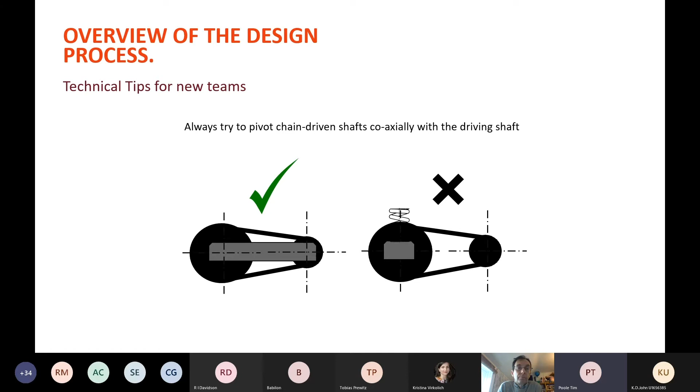Secondly, the other thing, make sure that when you drive chain wheels, the shaft can't move sideways either, because the moment you move a driven shaft sideways, longitudinally, the chain will fly off. So make sure whatever suspension systems you have perfect alignment, and it stays perfectly aligned along the length of the axle as well. It can't slide sideways. That, of course, is exactly how you change gears on a push bike. You really do need to make sure there's no longitudinal movement of the axle.

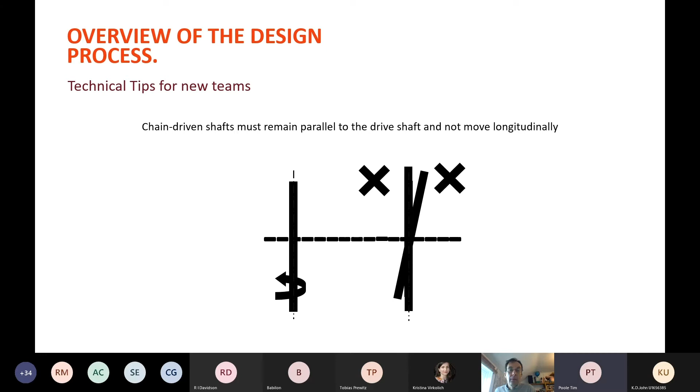The next thing is push connectors. This again was one team had a major failure of their locomotive, where a pipe fell off the back of the horn, believe it or not. That horn was being fed off the main air main running down the train, which of course is also what powers the brakes. And the locomotive correctly had a system that if you lost the air pressure, all the brakes went on. So literally, the connector flying off the back of the horn brought the entire thing to a very

severe and terminal halt. Basically, the pipe was held onto the back of the horn just with a rubber normal push fit connector, which in normal life would be fine. Locomotives are a very harsh vibration environment. Don't rely on push connectors. In fact, don't generally rely on anything where it is a single connection. In other words, with this push fit, there should have been a Jubilee clip round it as well. Not necessarily in normal environments. On a train, you need to do this.

If you're going to put circuit boards onto a backplane, don't rely on the friction of the circuit board in a backplane. That may be perfectly okay for a computer at home. It certainly is not on a train. It will fall out. So really look at every critical connection and make sure it's held in at least twice. We'll come to some more slides.

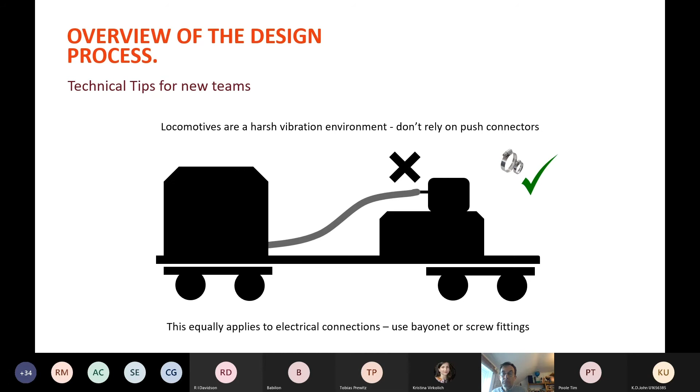And so there we are, another example. There's a push fit of a PCB going into a backplane. If you do have such a device, remember that will fall out as quick as you put it in on a train. Trains have steel wheels running along steel rails, running along rail joints. They are being hit roughly every 10 seconds with a hammer. That's how you have to consider a locomotive.

If you push this into a backplane, it will come out as quick as you push it in within about 50 meters. Please double secure every joint.

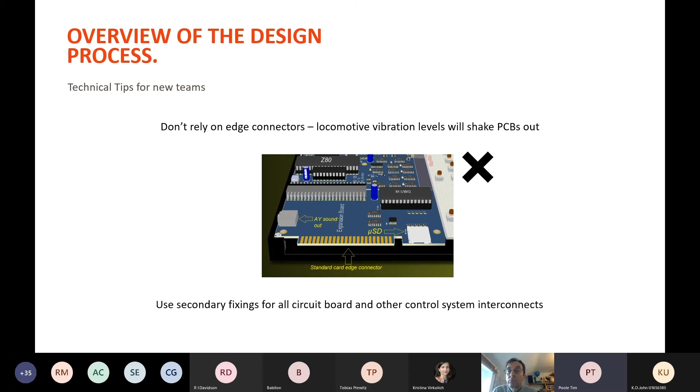Thank you, Kristina. Next slide.

And that, of course, is the same with nuts and bolts. Do not just use nuts and bolts anywhere on the locomotive at all. Please think of some way of locking them in. You can use any one of these systems that I've put on this diagram here, but please lock everything in. This is a very nasty vibration environment, a locomotive, and any nut and bolt that is not fixed twice, if you like, locked in some way, will come undone.

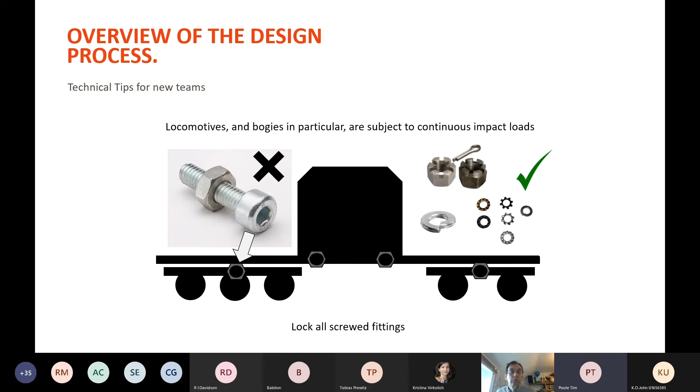The next thing is, and this is where we come to what we found was quite surprising on the challenge, which was it wasn't always the old teams that won, which was a slight mystery to start with, and then we realized what was going on.

If you have last year's locomotive and they have not done the wiring neatly, they have not logged the change to the wiring, they have not done proper wiring looms, proper diagrams, not put cable labels on, what happens is the team who then inherits that locomotive the next year, when it doesn't work, and that is almost 100%, they will have no chance of mending it whatsoever because they have not got any diagrams, any wiring labeling, and they will have no clue as to how to mend what is not functioning.

More for the sake of the next year's team, but even for the sake of yourselves, when it doesn't work in the field, when something goes wrong, please really do think about how a professional locomotive would be built. And it would be done with neat wiring looms, every cable labeled, everything written up on a schematic diagram, so that when things don't work, when things go wrong, you stand a chance of getting it mended. The number of times we see teams, sort of 8, 10, 12 hours working all night on locomotives, trying to work out why it doesn't work, what's connected to what.

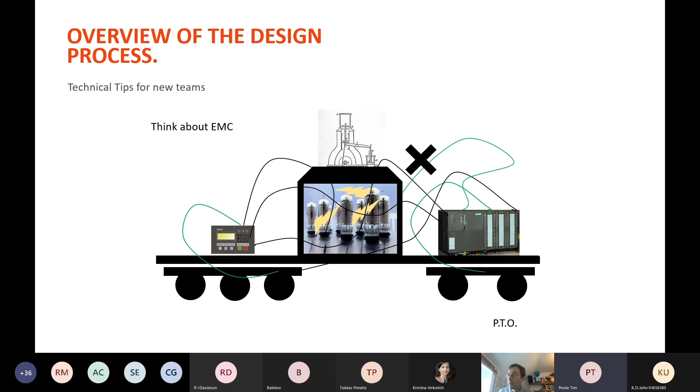So here's some quick hints and tips provided by one of my colleagues. Make sure you have isolated power supplies to power the control electronics. Electrically isolate all control inputs, outputs. Why not use opto-isolators? That's a very good way of doing it. Keep the control wire neat and away from the noise sources, unlike that diagram you just saw. Use twisted pairs and screen cables. Think about if you can't avoid it or you're worried, screen the cables.

Have a common chassis earth. Make sure that everything goes with a single connection to the ground, not 2 connections, or it'll build up earth loops. Avoid circulating screen currents in the control electronics. Have a common connection point for screen connections. Again, back to that single earthing point. Obviously, if you can, put stuff into earthed metal enclosures rather than plastic enclosures. That will help you as well. There's just a few hints and tips.

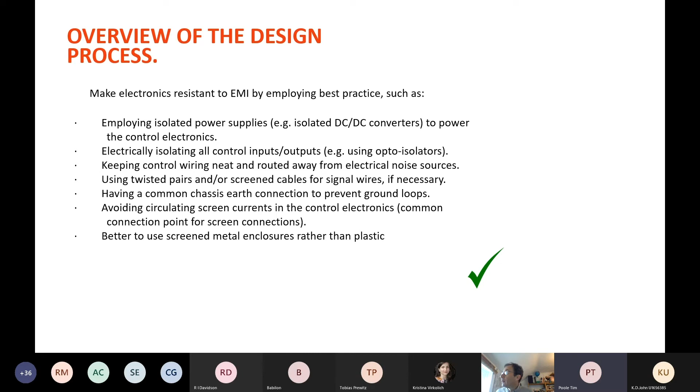So really think about EMC because the trouble with an EMC fault, there is not an obvious fault. It's not something you can see. You can't work out why the signal isn't going from A to B. They appear to both be connected at both ends. These are very difficult faults to isolate. So really think about EMC. Next slide, please.

Also bear in mind when you're doing your design, many of you will use generators. Remember that the signal coming out of a generator is not the neat sine wave that you were imagining it might be. It will be a very spiky, nasty thing. So make sure you think about either overrating your electronics by a huge amount or having some sort of spike blockage system. If you have all your components rated exactly the amps you think they're going to be, because that's the cheapest one to buy, it will fail immediately

because there are very few parts of the traction system on a railway locomotive that actually have a neat sine wave or a neat straight line that you think they do. Really overrate your electronics, and my colleague will come to this further, and really make sure you have all kinds of suppression systems. We have had so many teams over the last 8 or 9 years who have fried their electrics because what theoretically is needed is not what actually happened to the wiring. So really think about this.

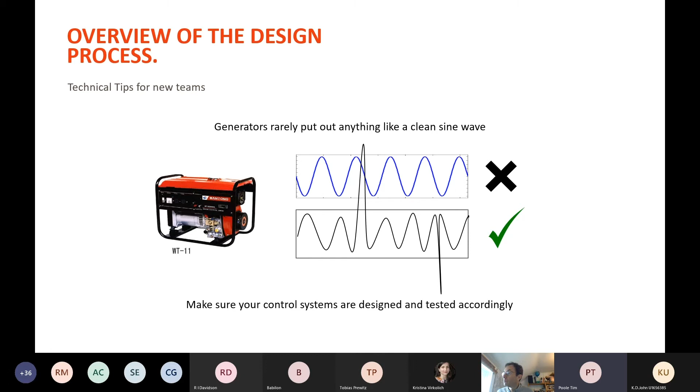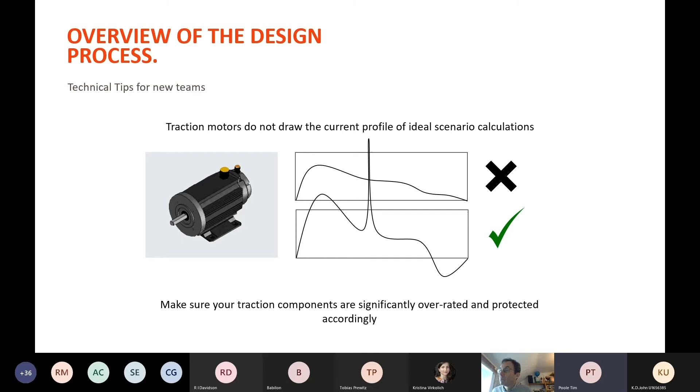And of course, at the end, if you brake, motors are generators. So what you think will be a positive current going into the motor, it will just generate electricity back the other way. And if you've got components that don't like that, because you assumed which way the current was going, they will be fried. So be really careful to make sure you have a huge overrating, huge spike suppression, and huge tolerance on your traction components. Because it's been really sad to see teams not being able to run their locomotives because of burnt out electrics. Thank you.

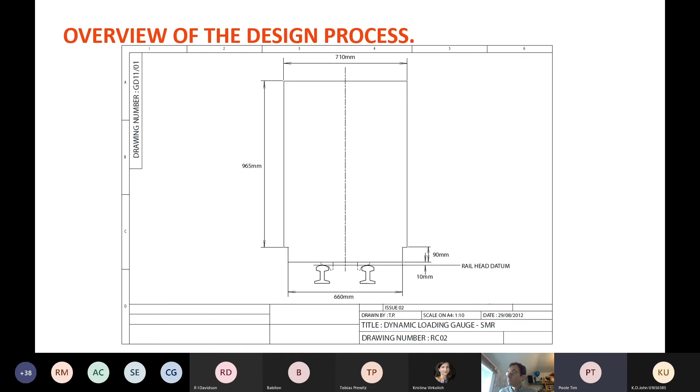Thank you, Tim, and good afternoon, everybody. So I'm going to tell you a little bit about how much power we need to create in order to move our trains, or your trains. So next slide, please.

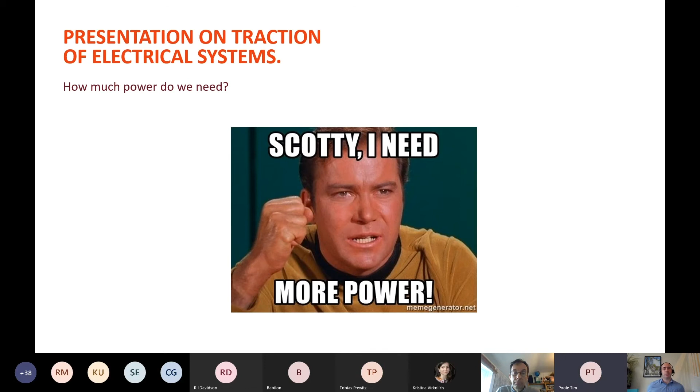The physics of traction is really remarkably easy. It's basically Newton's law, F equals ma, and the forces that are working on your locomotive and coaches: if there's a difference between the forces, then the train will accelerate. So the traction force is what you apply to the wheels and to the rail, and then there's a resistance to motion and/or obviously gradient slopes.

It turns out that actually the gradient slope is the most significant thing you need to worry about for this challenge. But before I talk about that, when we normally do this, we're normally face to face, and it's quite hard not being face to face.

But I always ask a question: has anybody in the audience ever pushed a train? And a lot of people go, how, that's not possible. So if any of you have pushed a train, can you just say yes in the comments? I want to see how many have. And I know there are definitely people in the committee that have pushed trains. I can guarantee it. So I suspect Malcolm might have done, and maybe Tim. I don't know if you're allowed to do it, but yep. So I've got one yes already. So you can actually push a rail vehicle. Oh, there's loads of you.

Excellent. You can push a rail vehicle because it's got a very, very low rolling resistance. So when it's on the flat, you can move a coach with just a few people pushing on it, and that coach may weigh 20-30 tons or something. So it's really remarkable. So when trains are on the flat, it's quite easy to get them going and to keep them going. But when the train's going up a hill, then you need the power.

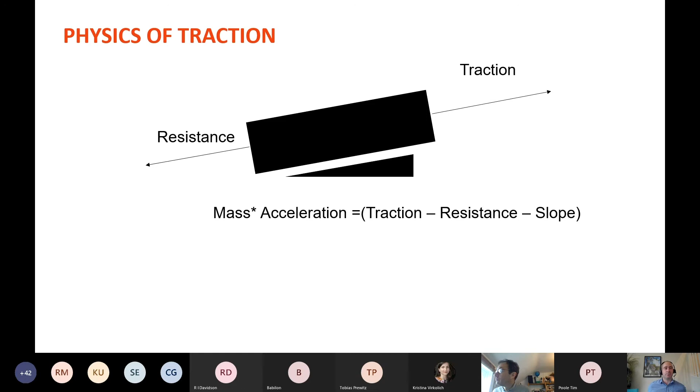So just doing simple calculations can give you an amount of power. One thing I'll come on to in a bit, you need to match this power requirement with the motor power requirements. And what you'll find is you can get very high powered motors, but they only produce their maximum power when they're spinning at their maximum speed. So you need to bear that in mind, because you need to have a gearbox which might be going from a very high ratio down to something very low, and that often is difficult. So what we found is many teams end up overrating their motors based on the torque that's required rather than the power. So you might have a very powerful motor, but you're not using the full power capability of it. Next slide, please.

In the power calculations, we need to worry about losses as well. So you obviously have energy coming into your vehicle with primary energy, and some of it's lost in its trip to the wheels, and obviously you get some back through regeneration. So you need to take into account all of these losses, otherwise you'll end up with an underspecified system. So next slide, please.

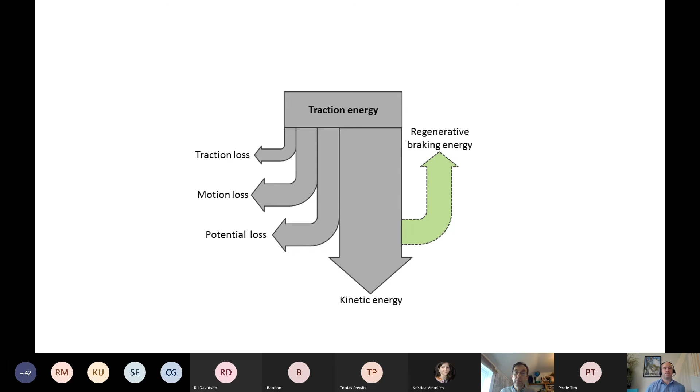Yeah, that'll be the power required to go up the hill, and you'll need to then size everything based on that fundamental power requirement at the wheels.

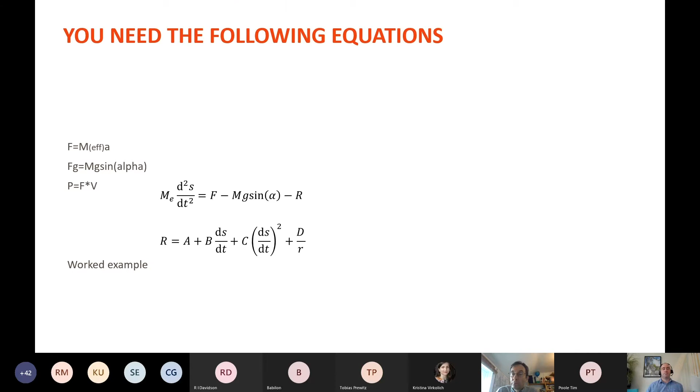Next slide, please. I just want to talk about some of the motors that you're going to potentially buy. There's kind of three options really. There's one which is called an induction motor, which is an AC, alternating current, motor. One which is DC brushed, and then the other which is DC brushless, which is actually a bit like an induction motor to some extent, but it's a bit of a hybrid between the two. You need to think about which one you want to use. If you're really not sure, then the easiest one to use is probably a DC brushed motor. But if you've got good power electronics people and motors people on your team, then maybe go for something more complicated like an induction one.

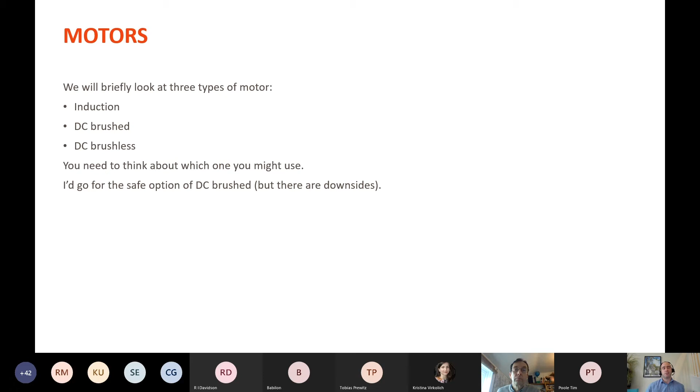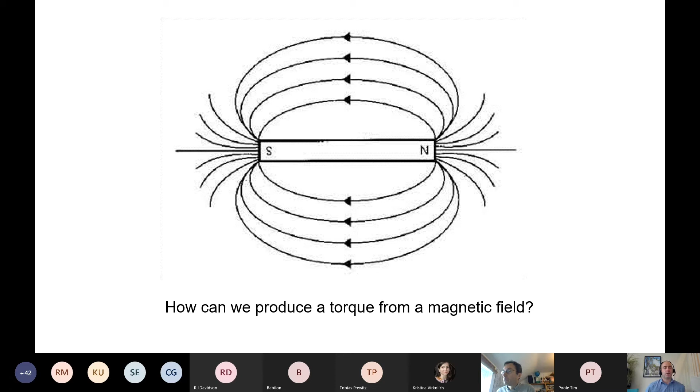Next slide, please. Now, inside motors are magnets, and nobody understands magnetism, but this is a picture of a north and south pole from a bar magnet. And as you know from playing with magnets as a kid, they exert a force, and you can make things move with them. And that's what we harness inside a motor, the ability to move magnetic fields and create torques within the motor itself. Next slide, please. In a typical motor, you've got the outside bit of it, which we call the stator, the inside bit, which is the rotor, which rotates, and then your end housings.

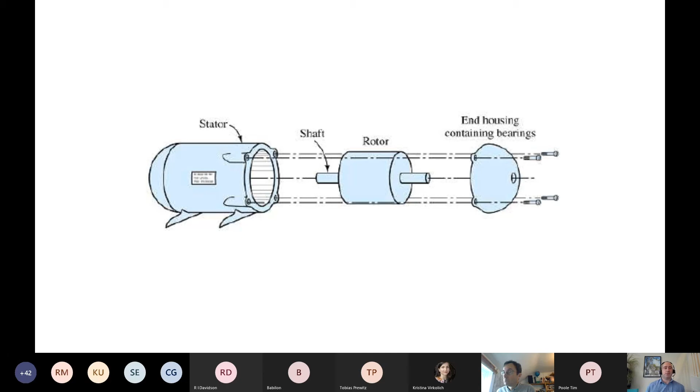Next slide, please. And this is just an example. You will also find windings inside motors. So A and A dash here are representing a loop of wire which runs around the machine. It runs along one end and then comes out the other end and then back along the opposite side of the stator. And shoving current through that will create a magnetic field. And by carefully managing that magnetic field, we can create a torque and get the rotor to rotate.

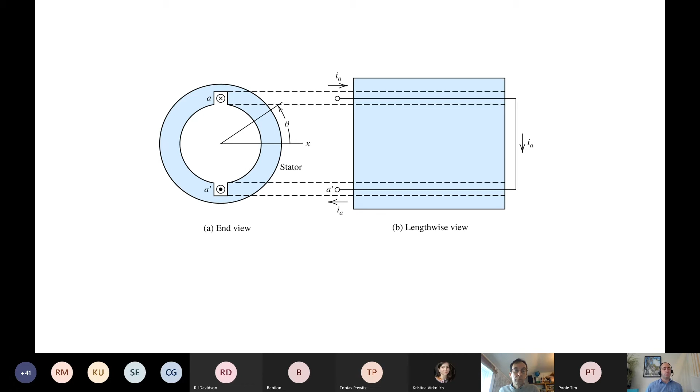So next slide, please. So inside your little motor, you actually get field lines which look something like this, and it's similar whether it's an AC or DC one. So there's actually a really, really strong magnetic field inside your machines, and most of that stays inside the machine. Very little of it escapes. But just reflecting on some of Tim's comments, he talked about electromagnetic interference. Your motors will generate stray magnetic fields. So if you put sensitive cables right next to motors, then expect to get some problems of electromagnetic induction into your control cables. You just need to be wary of that.

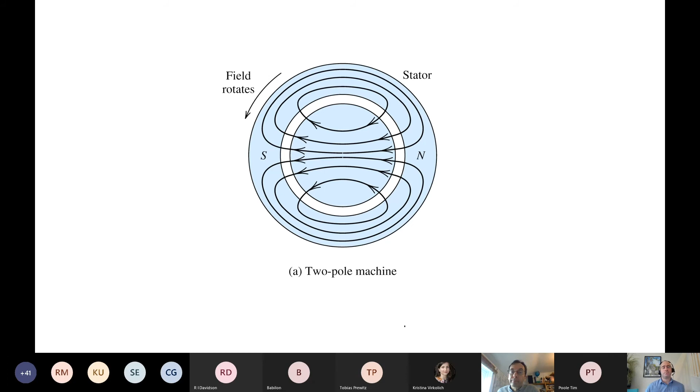So next slide, please. This shows a picture of a three-phase supply system. So if you're going to use an AC motor, you need to generate three phases on board your train. So if you've got confident electrical engineers within your team, then this would be a very, very good way of doing it. It is in fact the way most trains are driven. Most modern trains have AC traction motors, and they generate a voltage like this on board the train and send it to the motors. And in order to change the speed of the motors, you need to be able to change the frequency of this supply. So it's got to be a variable frequency supply.

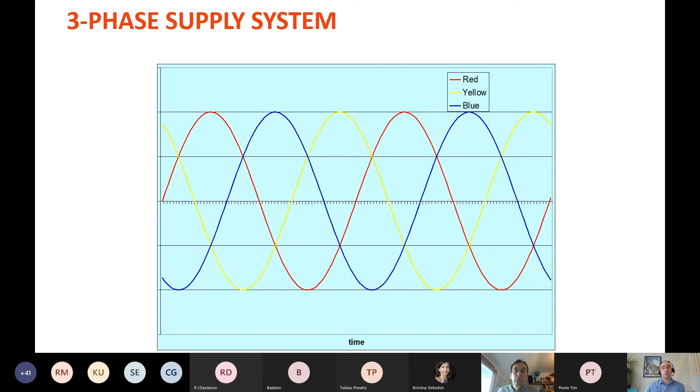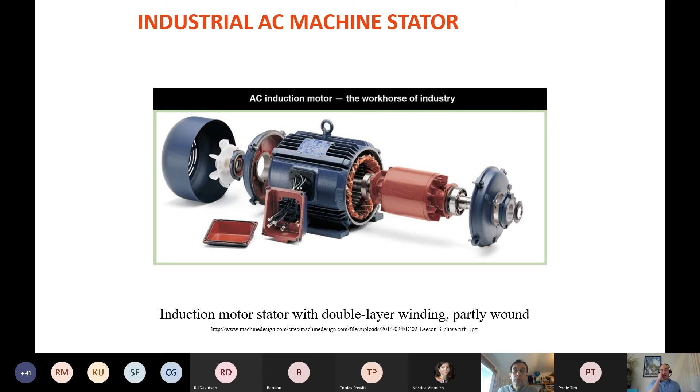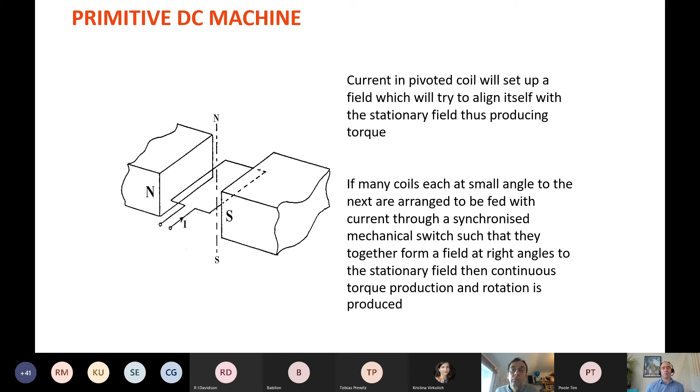Next slide, please. So with a DC motor, we only need to control the voltage that we give the motor and monitor the current. We control the current that's going into the motor by varying the voltage. So if you have a DC motor, you need a variable voltage DC source in order to drive the motor.

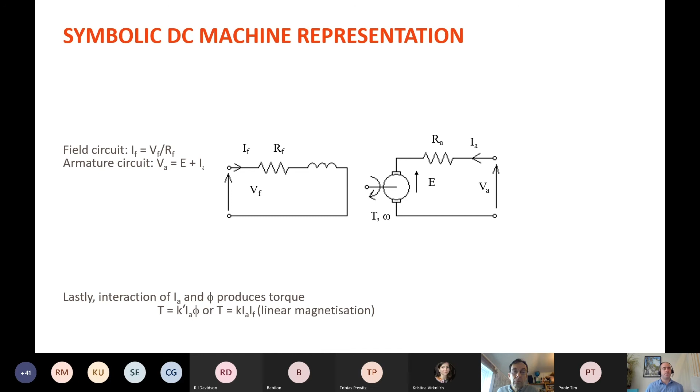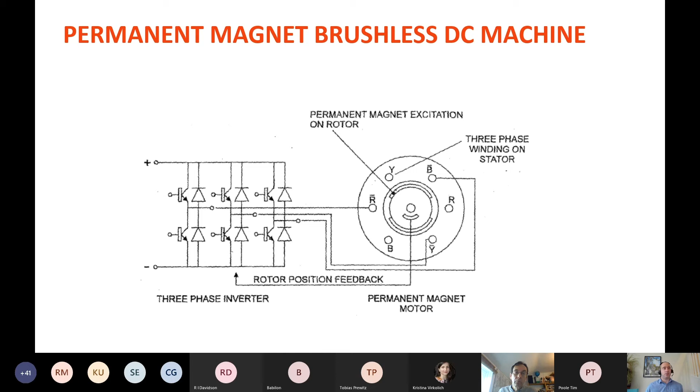And next slide, the final motor one. This is a brushless DC machine. So these are the common kind of motors that you get for running drones and remote control cars and stuff like that. And you can get some really high power ones now, and they're quite easy to control. And they're very efficient. They're really good things to have a go at. So think about them too. Next slide, please.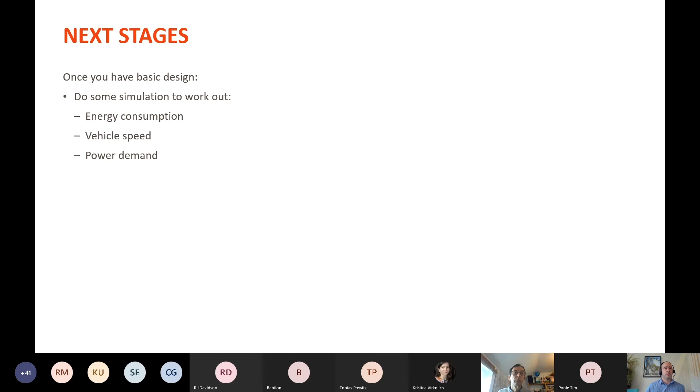Next slide, please. So the next things you need to do is to work out how much power you need, the energy consumption, and how fast you need to go, and so on. Next slide, please. Things you need to start thinking about buying are the motors, motor controller, and something to control the motor controller. So your motor controller will need an input for itself too.

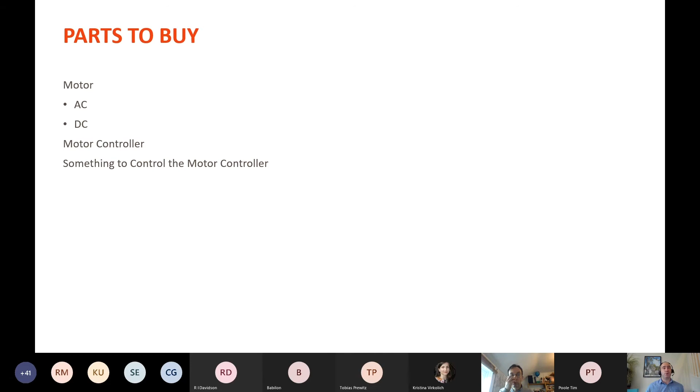And next slide, please. Problems. We already mentioned this. Power circuits are high power, high current, high voltage. If you've got electronics nearby, they could get interfered with. So most students will blow up motor controllers and electronics during the course of building this. We also need to think about what happens with e-stops as well. What happens when you hit the e-stop in terms of shutting down the train.

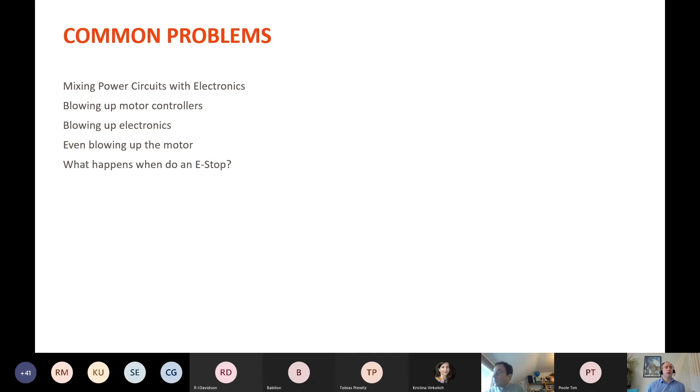Next slide, please. More things to worry about. These we've already mentioned. There's cable IDs, crimping, and terminals. So if you put your cable in and you screw something down onto it, what will happen is that will come undone. So crimping is really, really important, and how to attach it to stuff. Railway does this very, very well. Normally, if you're using choc blocks for anything, they will come undone and something won't work. So no, they're a big no-no.

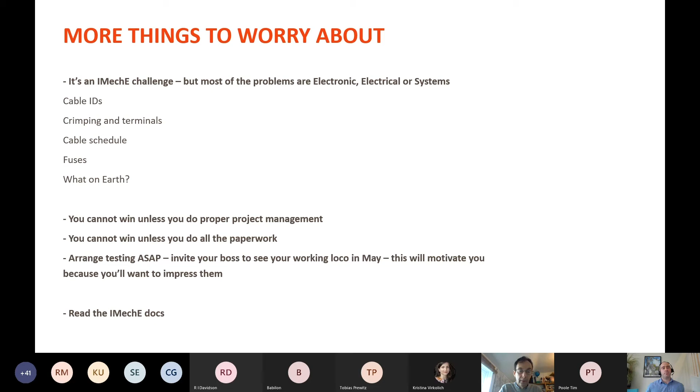Cable IDs are really important. So the team coming after you can fault find, and also you can fault find a lot easier. And then thinking about earth in your train, what does that mean? Earth in your train, that's a big issue, particularly when you think your earth cables might need to carry fault currents. Next, please.

So yeah, just a final point about people inside your teams. And I've worked in lots of big teams. You have different types of people: organized people, unorganized, extroverts, introverts, team leaders, followers, and worriers. Ideally, a team's got all of them in it. You need to find out who's doing what, and then work within the team to get the best out of each of you.

And then I've got a final slide, and then I want my colleague Felix to say a few words. So can you show the next slide? The diagram on the right is what your locomotive should look like, not the one on the left. Okay, so the one on the left is a complete nightmare. So Felix, can you say something quickly about the supercapacitor voltage and a bit about wiring, if you want?

Thank you. Yes, I think. And then afterwards, Felix, you can hand straight over to Malcolm. So thank you very much, everyone. Thank you very much, Stuart. Thanks, Stuart. Can I keep that slide on, Stuart, for a second?

The left-hand side is, as Stuart says, an absolute nightmare of a wiring system, because none of the wires are labeled apart from the 2 or 3 which have been added late. The one on the right-hand side looks really attractive, but if anything goes wrong and you have to try and take a wire out of this and get the thing back together, it's not easy. So you need to find a good compromise between the 2 options of something which looks really good and something which is easy to fault find.

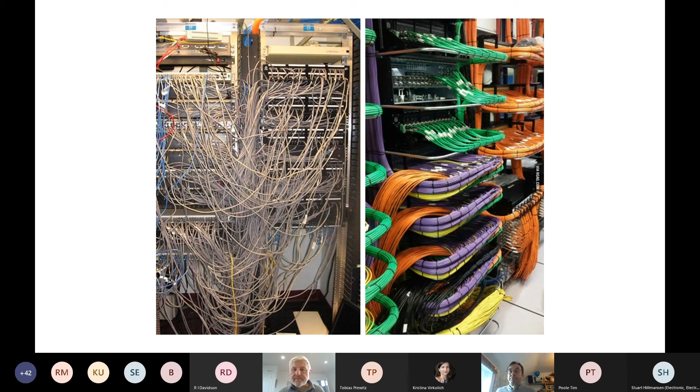Hello, everybody. I'm talking on behalf of the judges. Bill Reeve is our chief judge, and I assist him, and I judge the design competition myself. The thing about the judging is we want all the teams to do their best.

This isn't something where we want everyone to observe the rules to the absolute minutiae. We will stretch the rules as far as they possibly can be in order to make sure that good ideas are recognised. But if you get things really wrong, if things are done unsafely, or there are other significant lapses, then there will be penalties, and any persistent or gross safety failure might attract severe sanction. In the worst case, people might get disqualified. Sorry to start on such a negative point, but it's important to get that out of the way.

Next slide, please, Kristina. Next slide, please, Kristina. Thank you.

So when I judge the design challenge, all I've got is what you write and any illustrations you provide. I can't see it, I can't touch it, and you should take all the space that's allowed to you to describe it. It really is no accident that teams that score the highest marks generally use all or nearly all of the page count that's allowed.

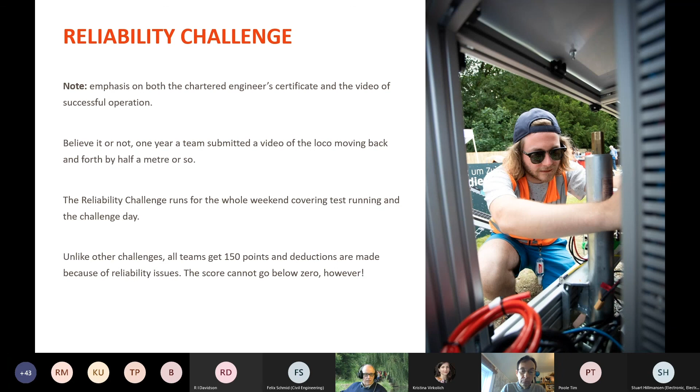Auto stop challenge is a tough one. I don't think any team has yet succeeded in stopping accurately. So bear that in mind, and also bear in mind that even full-size railways don't find accurate stopping easy. We've found that too much braking will stop short, too little braking might overrun, but curiously, a little too much braking might still cause an overrun, contrary to what you might think.

And for the ride comfort challenge, don't forget to provide the easily accessible mounting plate for our accelerometer. Next slide, please.

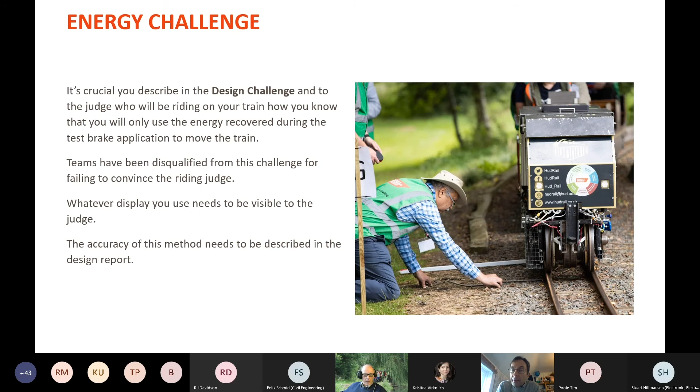The energy challenge, I think Felix has already really covered this quite well. You have to be able to demonstrate to the riding judge how you know that you have only used the energy recovered during the test brake application to move the train. Teams have been disqualified from this challenge for failing to convince the riding judge, so that's an important thing to bear in mind, and take into account all the things Felix said as well. Won't add any more on that one, so please move on.

Next slide, Kristina. Traction and noise are straightforward. The traction challenge runs on the up gradient at Stapleford, which we've already said is about 2%, and the noise challenge is run more or less concurrently, and that doesn't seem to give the teams any problems at all.

So I think that's about my last slide, but I'll just make the point that all the judging is based on the real life railway. Tim made the point that the specification is based on a real life specification. Judging is not dissimilar to what will be carried out by people judging tenders, assessing design reviews, scrutinizing designs to make sure they comply with standards and regulations, and checking that vehicles perform in accordance with specification. So if you've got any queries at any time about judging, don't hesitate to ask.

Finally, penalties. Things will go wrong. We will give out penalties if people get things wrong. They're mostly described in the rules. And if you do get penalties, we will seek to advise team leaders individually before we give out the prizes. But if time's tight, we might only talk to people in advance if the scores are very close and the penalties might make a difference.

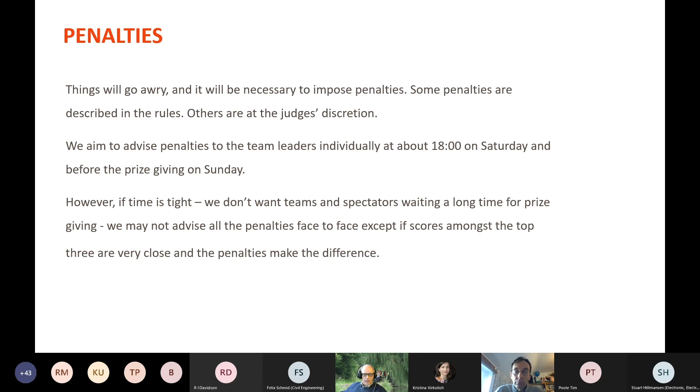I've been looking, I don't think I've seen any questions in the chat. There were a couple of comments when you mentioned that the braking hadn't been accurate, Malcolm, and Arkan pointed out that I think they did get very close, didn't they, last year or the year before? Don't remember the number, but it was millimeters. I think that's fair. Yes. Yep. I forgot that bit.